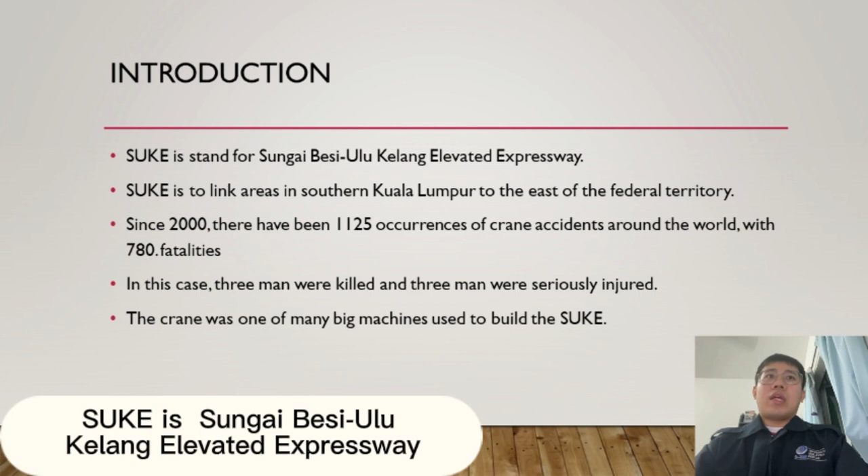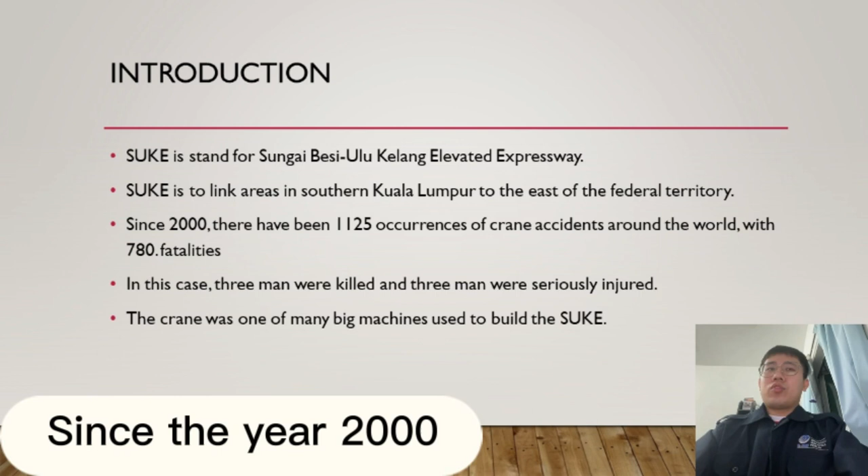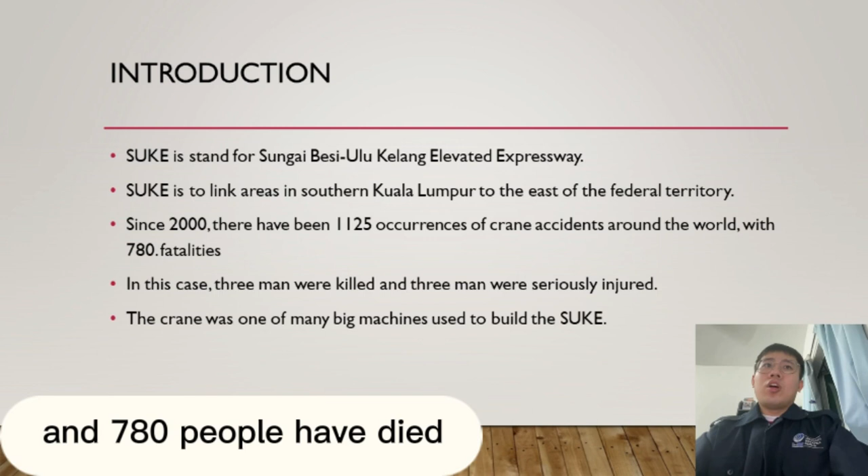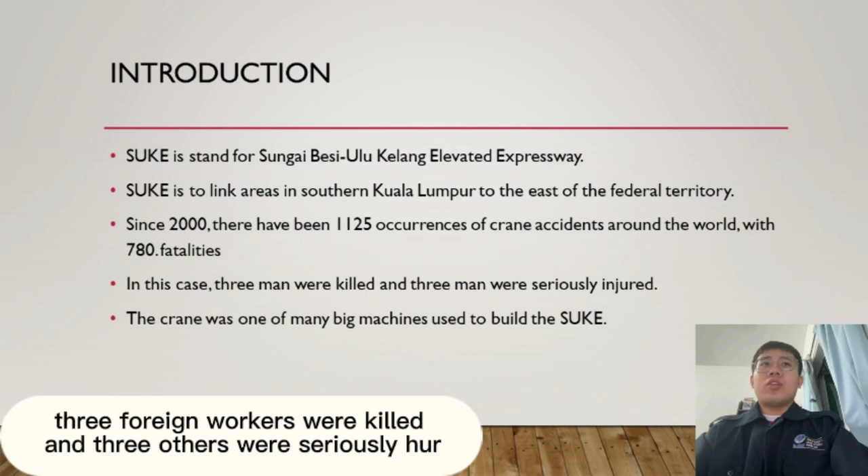SUKE is the Sungai Besi Ulu Kelang Elevated Expressway, linking southern Kuala Lumpur to the east of the federal territory. Since the year 2000, there have been 1,125 crane accidents around the world and 780 people have died. On March 22, 2021, 3 foreign workers were killed and 3 others seriously hurt when a falling crane hit them at a highway construction site near Persiaran Alam Damai in Cheras.

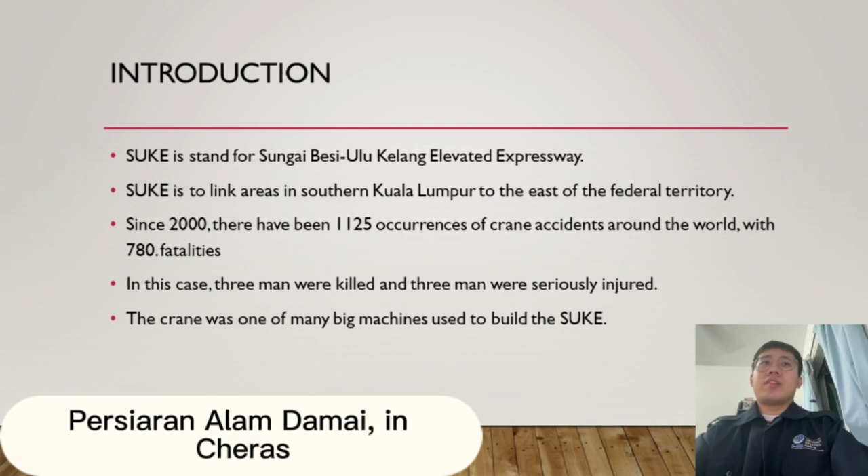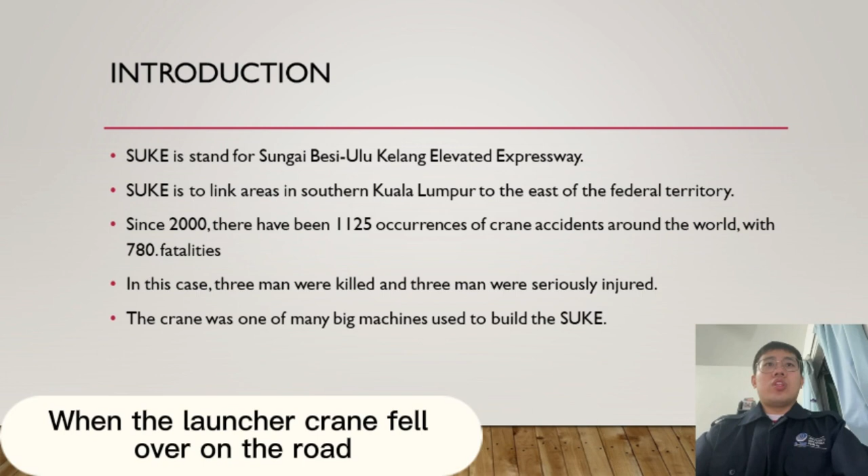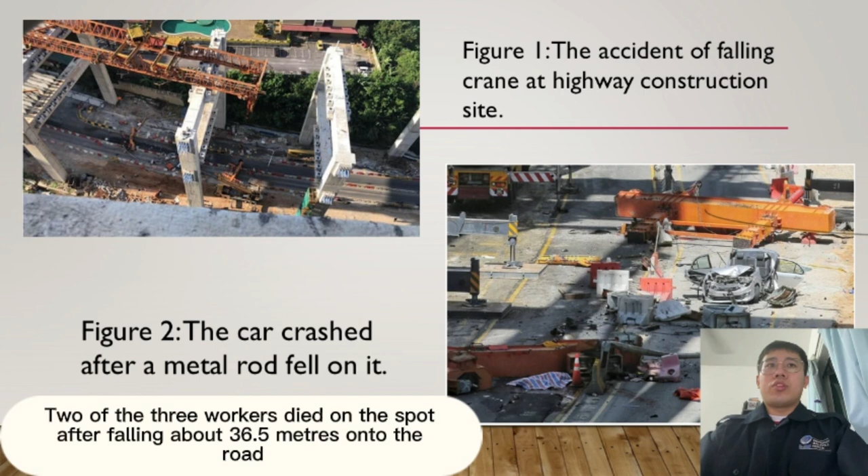The crane was one of the bigger machines used to build the SUKE. When the crane fell over onto the road, it crushed a car, badly hurting the driver. Two of the three workers died on the spot after falling about 36.5 meters onto the road. The third worker, who was stuck on the scaffolding, was also pronounced dead by rescue workers.

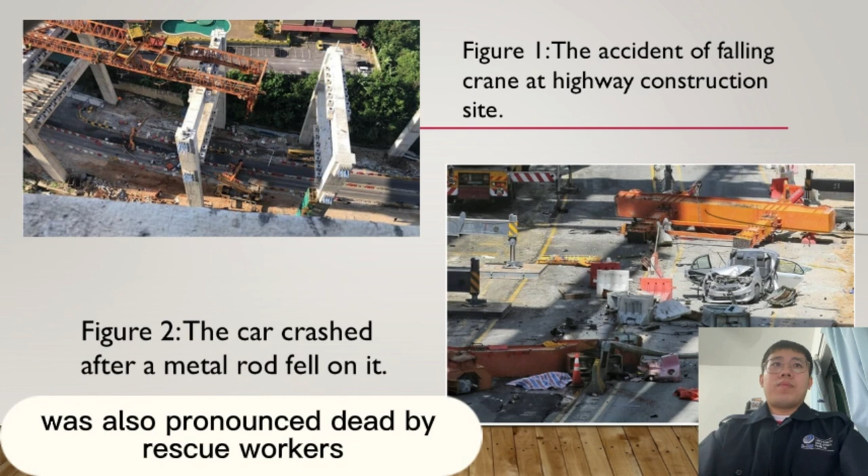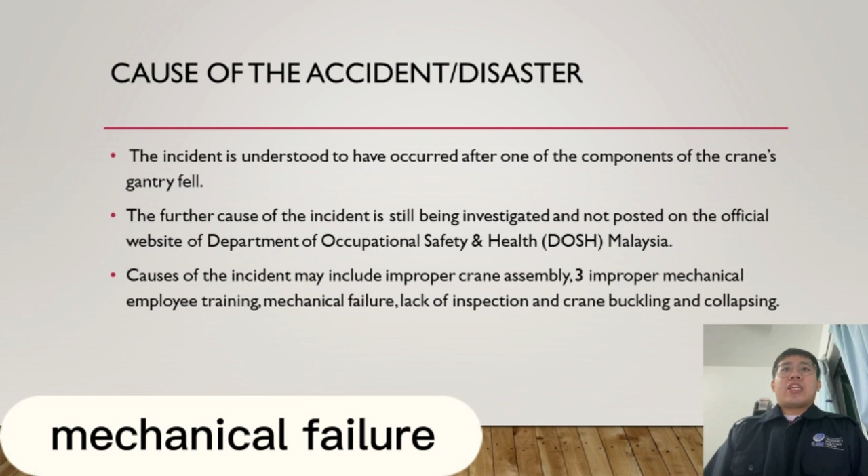Next is the cause of the accident. The incident is understood to have occurred after one of the components of the crane's gantry fell. The further cause is still being investigated and has not been posted on the official website of the Department of Occupational Safety and Health Malaysia. Causes may include improper crane assembly, improper mechanical employee training, mechanical failure, lack of inspection, and crane buckling and collapsing.

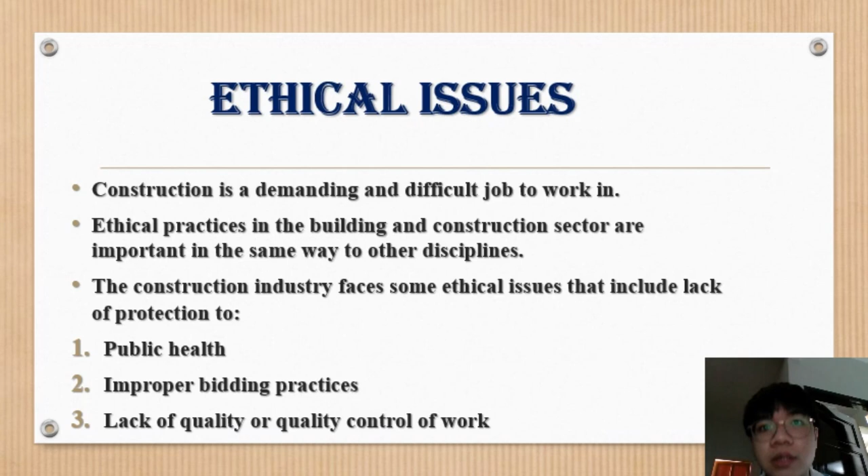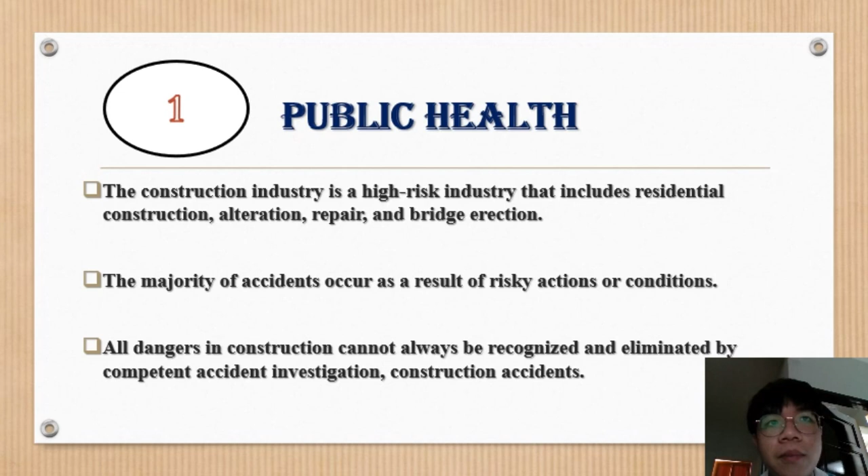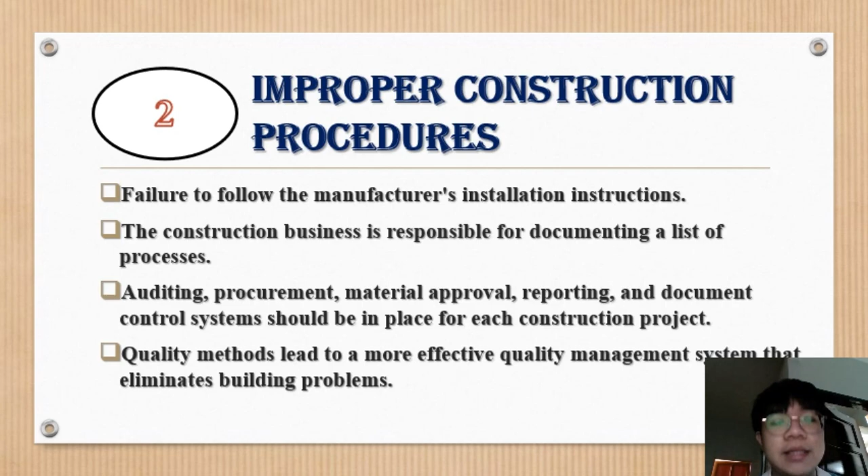The second one is improper construction procedures, such as failure to follow manufacturer instructions. The construction business is responsible for documenting a list of processes. Auditing, procurement, material approval, reporting, and document control systems should be in place for each construction project. Quality methods lead to a more effective quality management system that eliminates building problems. This is a figure of the list and how to reduce it.

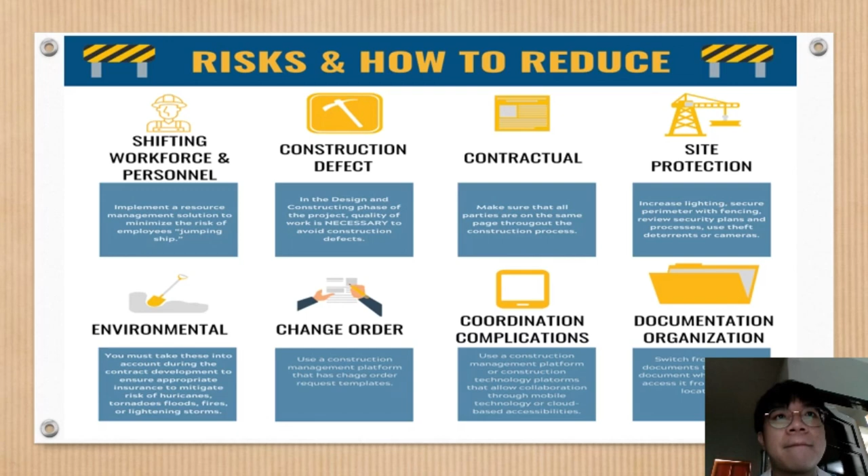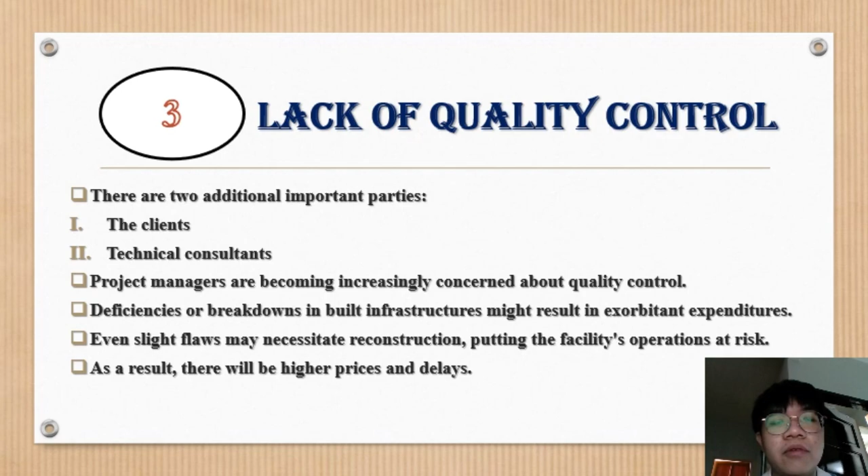The third one is lack of quality control. There are two additional important parties: the clients and the technical consultants. Project managers are becoming increasingly concerned about quality control. Deficiencies or breakdowns in built infrastructure might result in exorbitant expenditures. Even slight flaws may necessitate reconstruction, putting facility operations at risk. As a result, this leads to higher prices and delays.

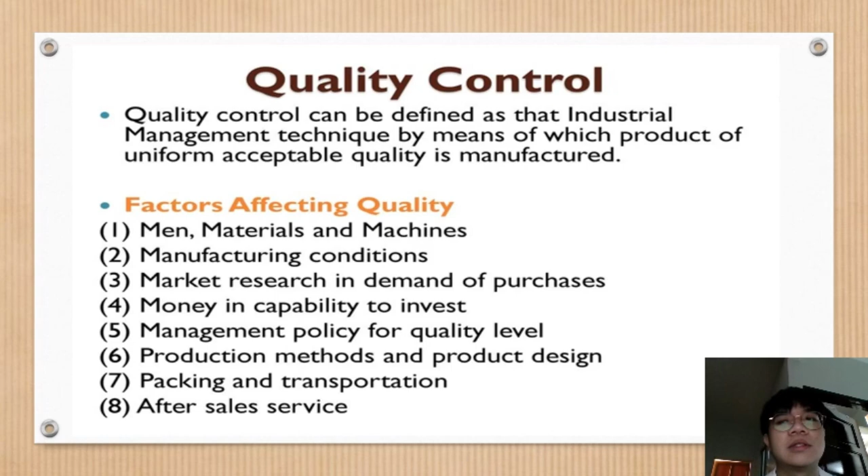The last one is code of conduct. Engineering is an important and learned profession. Members of the profession recognize that their work has a relevant and vital impact on the quality of life for all people. The service provided by engineers requires honesty, impartiality, fairness, and integrity, and must be dedicated to the protection of public health, safety, and welfare.

Engineers shall hold paramount the safety, health, and welfare of the public at all times. They shall approve only those engineering documents that are in conformity with applicable standards. They shall report to appropriate professional bodies, and when relevant also to public authorities, and cooperate with the proper authorities.

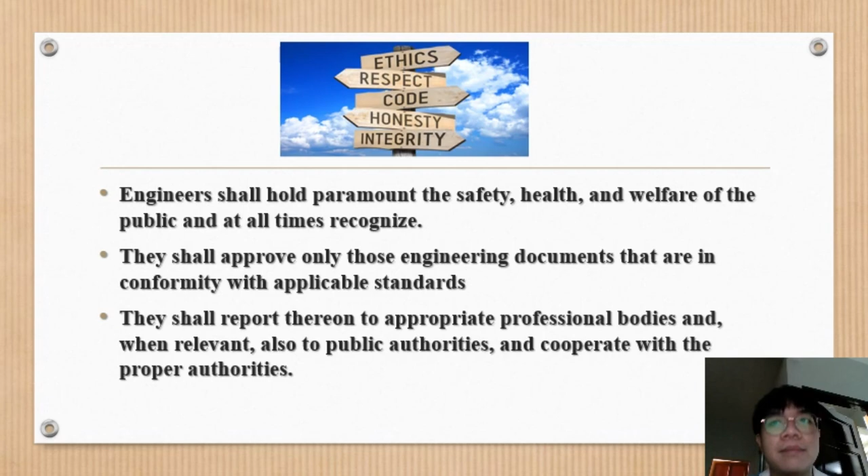So what is risk assessment? Risk assessment is a process of evaluating the risk to safety and health arising from hazards at work in order to prevent harm. A risk assessment involves carefully examining what could cause harm to people so that we can take enough precautions to prevent harm.

Risk can be calculated by the equation L multiplied by S. L stands for likelihood, which is how likely an event is to occur within a specific period, whereas S stands for severity, which is the outcome from an event such as severity of injuries, damage to properties, insult to the environment, or any combination of those.

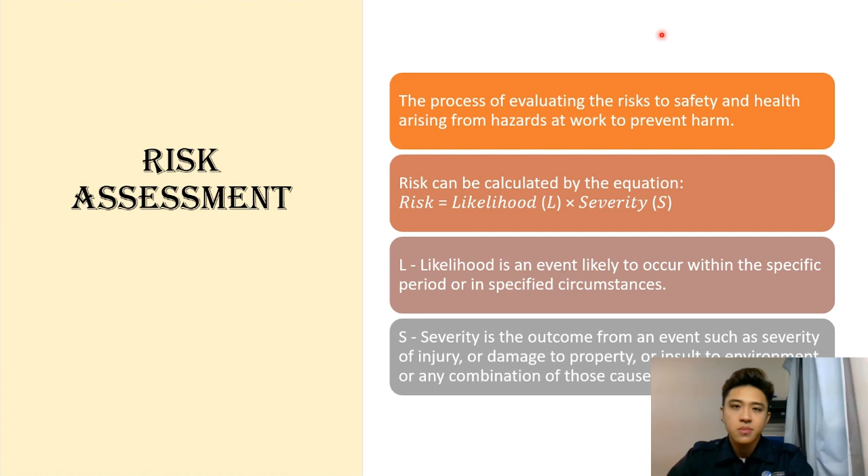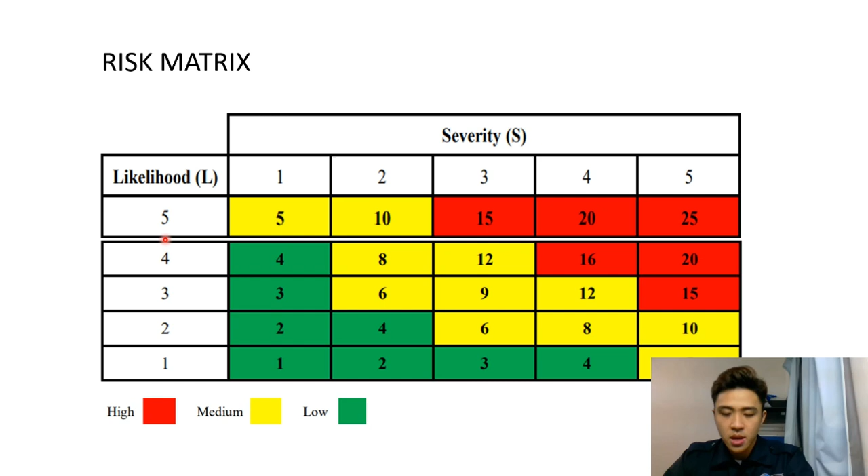So next, here's the table of risk matrix. In order to use this matrix, first we need to find the severity column that describes the outcome of the risk. Then follow the likelihood row to find a description that best suits the likelihood that the severity will occur. So the risk level is given in the box where the row and column meet.

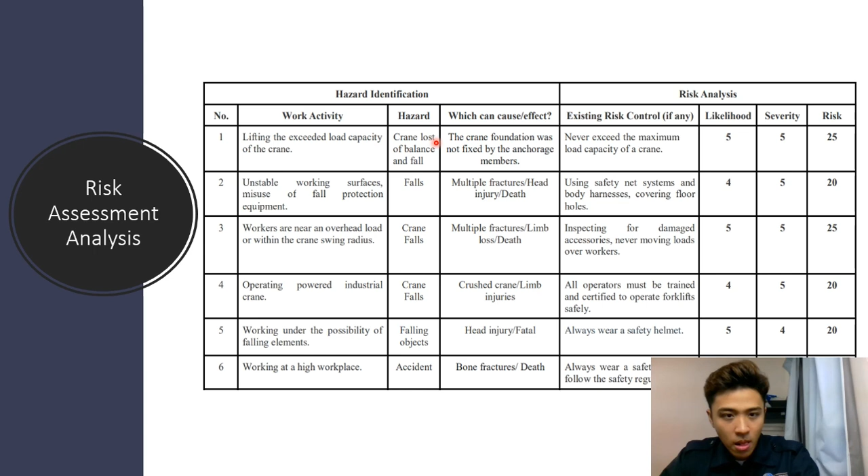Next, risk assessment analysis. For example, number 1, the work activity is lifting the exceeded load capacity of the crane, and the hazard will be crane lost of balance and fall. So which can be the cause and be the effect? It is the crane foundation was not fixed by the anchorage members. And then, existing risk, never exceed the maximum load capacity of the crane, followed by the likelihood number, severity, and risk number.

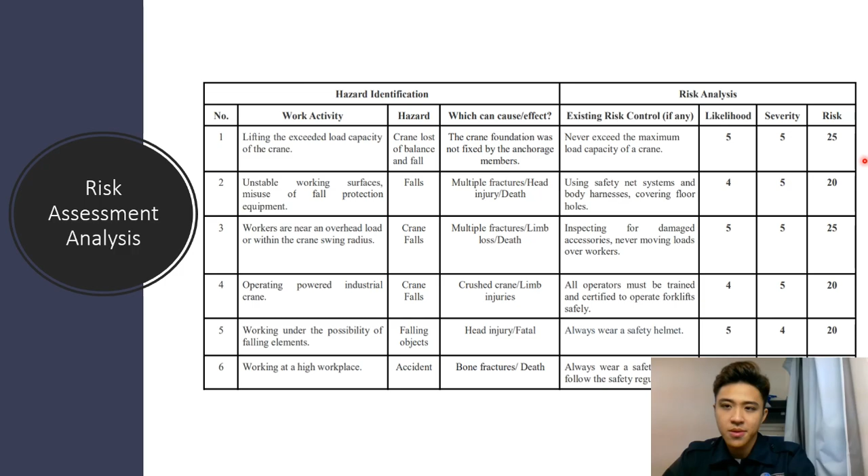So besides that, what is HIRARC? HIRARC stands for Hazard Identification, Risk Assessment, and Risk Control. It is fundamental to the practice of planning, management, and operation of a business as a basis of risk management. Organizations that have carried out risk assessment at the workplace have noted numerous changes in working practice, meaning this HIRARC brings a lot of benefits to organizations.

The purpose of HIRARC: first is to identify factors that may cause harm to employees and others. Secondly, to consider the chances of harm falling on anyone and the possible severity that could come from the risk. Thirdly, to enable employers to plan, introduce, and monitor preventive measures to the risk.

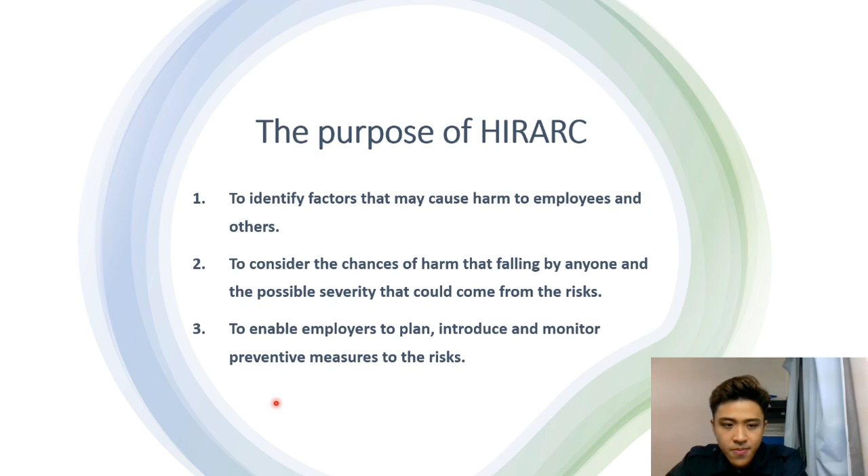And the last step is to consider the method or action to control the risk effect. So this third stage is to control and ensure that the source of hazard will not harm the workers.

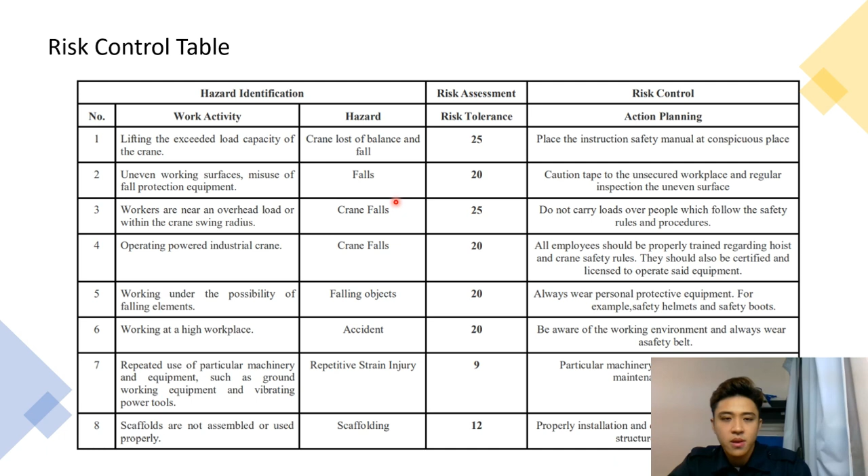So that's all from me. Thank you.

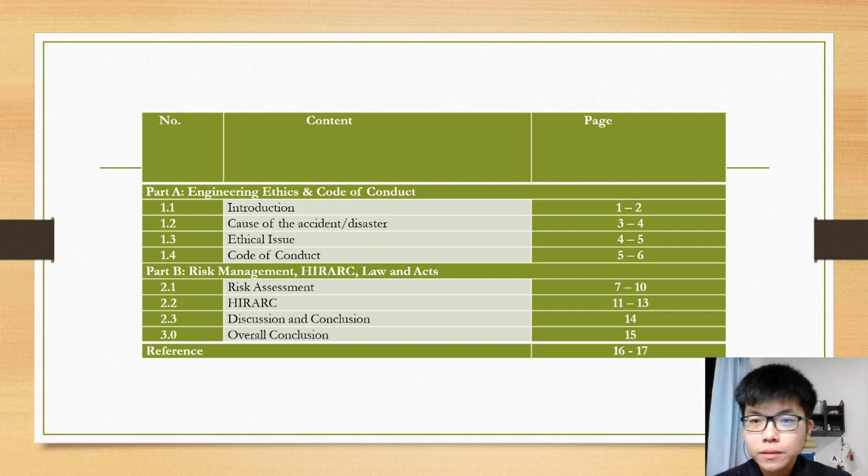Discussion and conclusion. By referring to table 3 and 4, there are various work activities that are required to be identified and observed at the construction site which will cause accidents or hazards. It was observed that the highest risk tolerance is 25, which is caused by crane components such as crane fall and cracking of crane arms.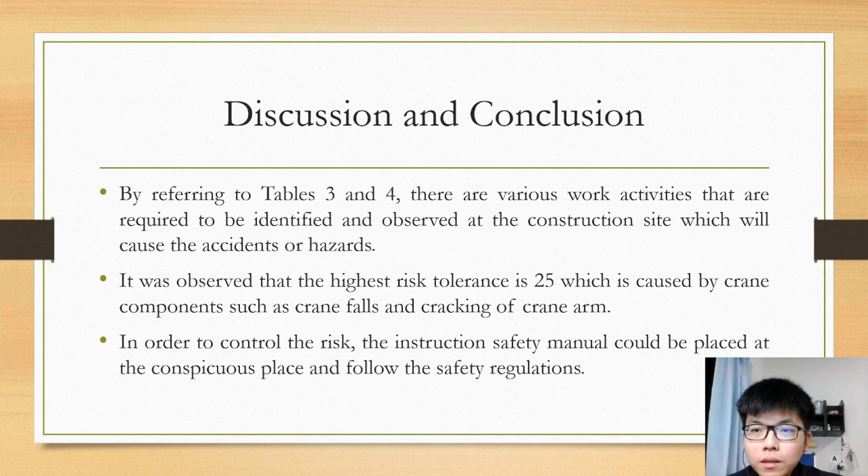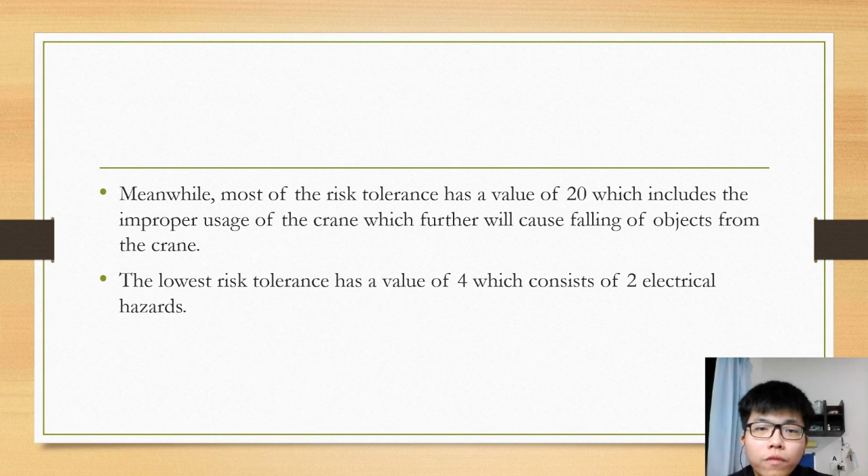In order to control the risk, the instruction safety manual could be placed at the conspicuous place and follow the safety regulation. Meanwhile, most of the risk tolerance has a value of 20, which includes improper use of the crane, which further will cause falling of objects from the crane. The lowest risk tolerance has a value of 4, which consists of 2 electrical hazards.

Overall conclusion: the construction industry makes up an important part of the Malaysian economy, which could be described as a substantial economic driver for Malaysia. In this report, it presents a variety of causes of crane accidents at construction sites, ultimately recognizing the causes of accidents will enhance general safety at construction sites. The result may assist in improving safety performance related to crane operations and developing more effective regulation.

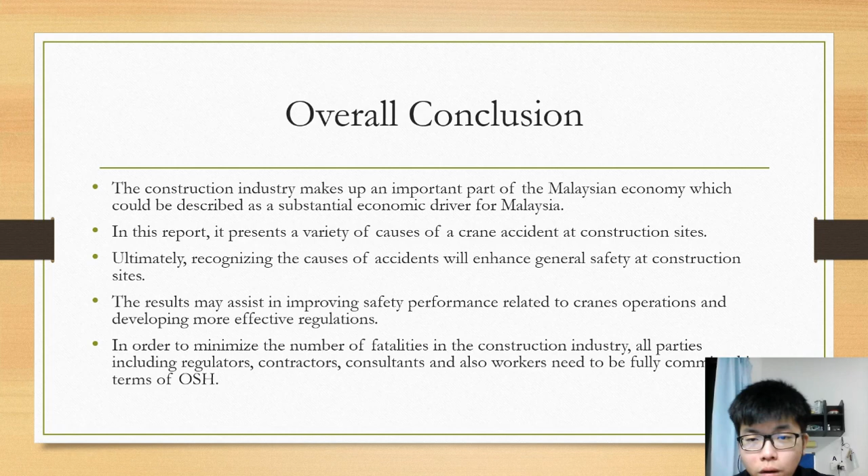In order to minimize the number of fatalities in the construction industry, all parties, including regulators, contractors, consultants, and also workers need to be fully committed in terms of obligation to the rules and regulations, which will minimize the number of fatalities and will indirectly improve the quality of life and the Malaysian economy.

Therefore, it is becoming more important and challenging to increase awareness among workers due to the enormous number of workers which constantly increases year by year. An effective management program is required to be implemented in the Malaysian construction industry to mitigate the causes of occupational accidents, which comprise human, worksite management, and external elements.